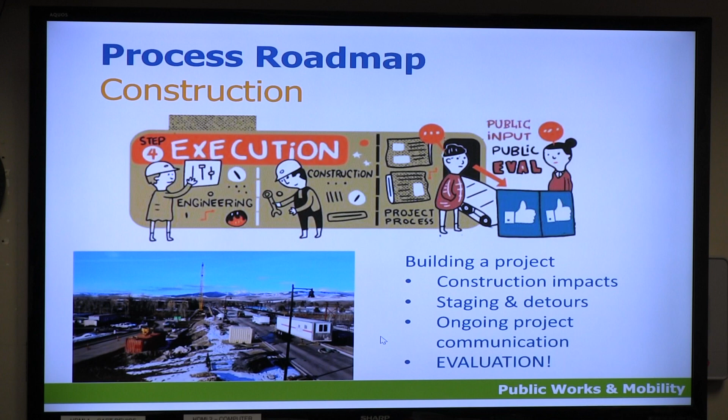I'm just going to go quickly through one of the other pieces we do. Missoula in Motion is our education and outreach program.

So we do all this infrastructure piece, but we also know we need to do the education and outreach for a whole variety of reasons, both from a multimodal transportation perspective, because a lot of research has shown that the idea that if you build it, they will come is sort of true, but not really in transportation, because it's just different decision making and different routes, and it's not always intuitive to switch modes. So what Missoula in Motion does is a lot of outreach and promotions, encouragement, trying to get people to try other modes, offer incentives to do that, education around safety and how to do other modes of transportation effectively and safely.

And then there have been a lot of changes like COVID and telecommuting, and we try to encourage places to offer telecommuting, because that is a sustainable mode of transportation. It takes a vehicle off the road every time you work from home, and that can be really efficient in the long run. So there's a couple of programs.

One is the Way to Go Club. This is our primary encouragement option. We have an online tool that helps people find routes, because again, the way you would bike is very different than the way you would drive often, and same with walking or transit. So it's just getting information out there, helping people understand how to make those trips if they're interested, offering rewards.

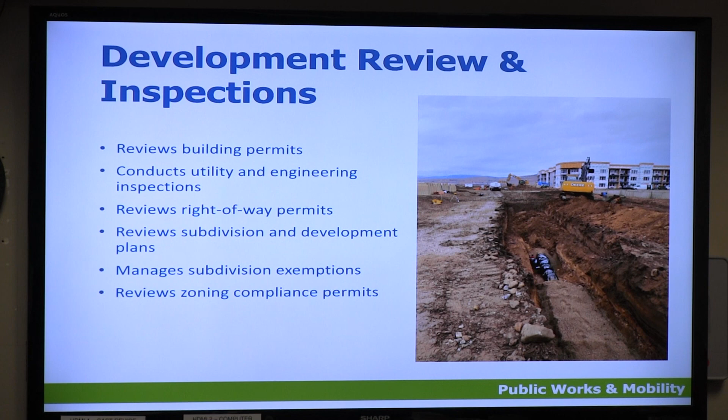In surface transportation engineering—basically in planning we get up through a project design, and then engineering takes over and goes through the more detailed engineering and construction. There's really good consistency in Public Works going from planning all the way through construction, and engineering comes in at that phase. Once we have a project funded, they work with consultants, coming up with designs, getting all those plans ready, and working with contractors to actually build the project.

They're also doing traffic studies and evaluating a lot of the projects we do, helping us collect speed studies, evaluate all that data, and make sure we're actually doing what we think we're going to do. So they take the idea and put the plans on paper and work through construction.

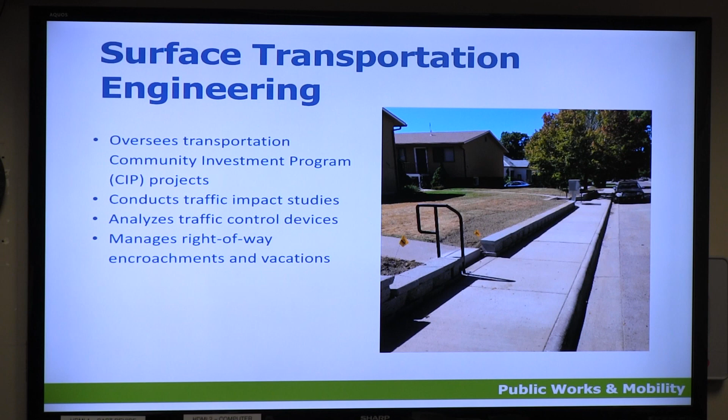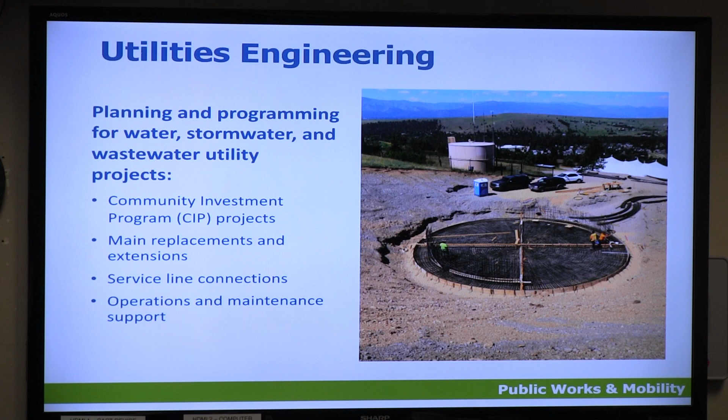And then finally, utilities engineering—you'll hear more about this from Logan and the work that water and sewer and others do—but they're working on CIP projects. These are all the utilities: sewer, water, and stormwater facilities. The engineers are helping detail those plans, create the projects, and help get them constructed so we have operating utilities.

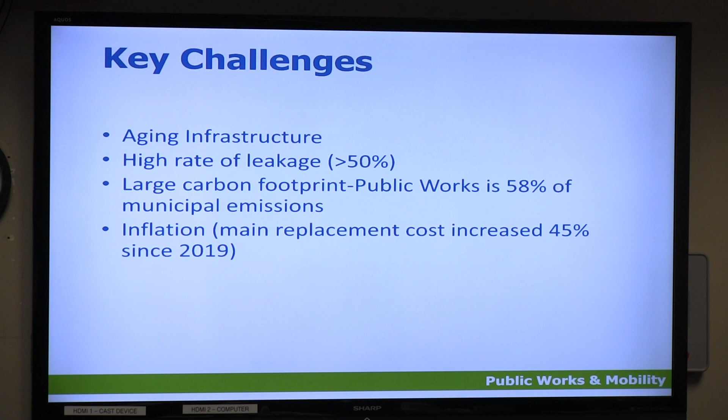Another challenge, inflation has just killed us the last few years. Just since 2019, the cost of replacing a water main has gone up about 45%. So that's been a real challenge for us.

Can you tell us where those are located? Right behind this building there's a patch in the street—there's what was called invasion pipe. The water company after World War II got a great deal on some surplus pipe, and the walls were about that thin 60 years ago, and now they're even thinner. They held up pretty well though. They're everywhere, mostly in the valley floor. The South Hills didn't develop until the 60s, so those pipes are 50 to 60 years old.

So you said the older pipes are metallic—what are newer pipes made out of? We still put in metallic pipe. About a quarter of the system is PVC pipe. For maybe 20 to 30 years we were putting in PVC pipe, but it's got issues. We had a guy almost die in a trench when a PVC pipe split while they were tapping it, so the water company moved away from PVC pipe. We wrap pipe in polyethylene now, which protects it from corrosion so it lasts a long time. But a lot of these older pipes weren't cathodically protected or didn't have any kind of barrier—they were just buried in the ground. So corrosion happens.

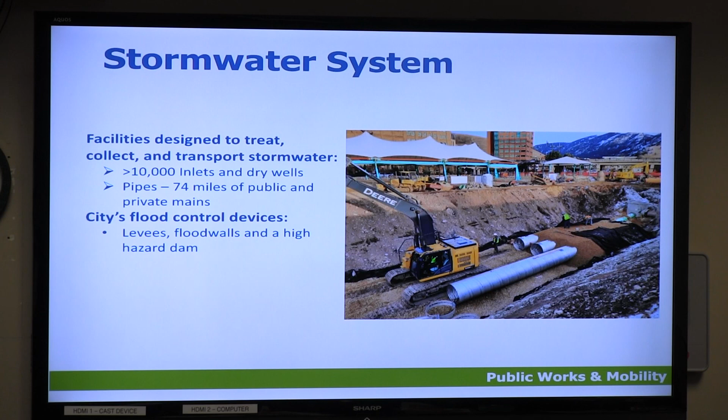The city also has flood control devices that the stormwater utility is responsible for — that's levees along the Clark Fork River, a flood wall just upstream from Caras Park, and we manage a high hazard dam in the Playfair Park area, which is designed to handle floodwaters from the Pattee Creek drainage.

We do lots of general maintenance. All these facilities must be routinely inspected and maintained to ensure they function as they were designed. Like I talked about the dry wells, we vac them out. A lot of times they just silt in — you can suck the leaves out, but a lot of silt gets down into the gravels too and eventually plugs them up. So that's Brian's crew, helping us replace hundreds of those every year.

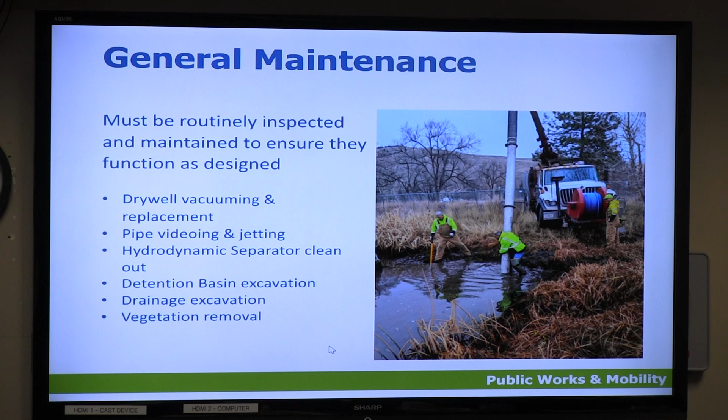We have a lot of detention basins in town. The picture here, I believe, is the sedimentation basin at Pattee Creek Drive. And we have lots of drainages that we occasionally have to excavate and remove vegetation and things from some of these detention ponds.

Some of the required sampling - there's 58 different outfalls to the various rivers and streams that flow through town. We're required to sample 6 locations twice a year, in the spring and fall, during rainfall events. The typical things we sample for are temperature, pH, metals, total suspended solids, chemical oxygen demand, nutrients, and bacteria. These are the things that have the potential to impact the water quality in our rivers and streams.

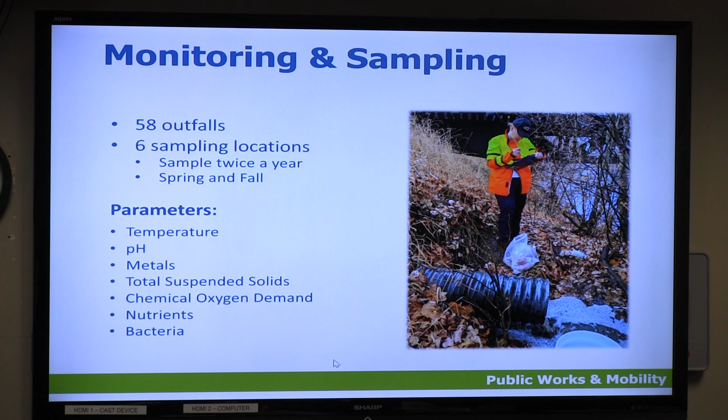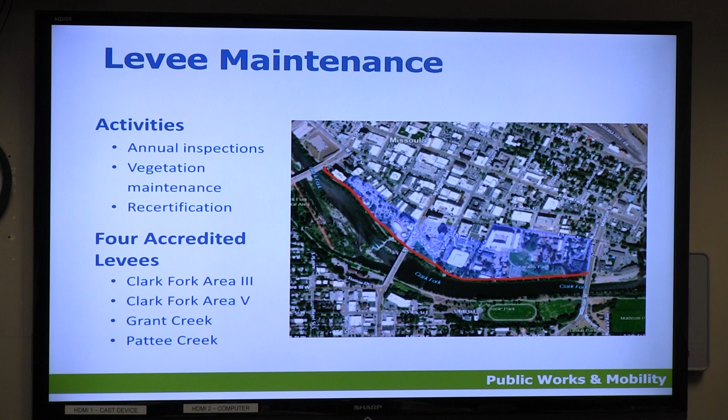On to the wastewater utility, unless there's other questions.

Wastewater has two main groups. We have the collections group on the right, which runs the pipes and lift stations that get the sewage from all the towns, homes, and businesses down to the resource recovery facility. We used to call it the wastewater treatment plant, but at some point it occurred to us that we're not just treating things, we're actually recycling materials and recovering a lot of resources. So we feel a lot better thinking of it that way, as a way to recover these resources.

That group includes a lab - we have several lab employees - and then facility operations and maintenance, and then the Garden City Compost, formerly EKO Compost, which the city acquired back in 2016, and I'll talk a little more about that. The wastewater division has 35 employees that keep all of these facilities running.

A little overview on the collection system: we have about 377 miles of sewer lines in town that collect the wastewater via gravity and take it to the treatment plant. But gravity doesn't always work, so we have 31 different locations where we have to lift it up so it can then flow by gravity to the treatment plant. Sometimes we have pressurized force mains, but for the most part the lift stations just bring it up to a higher elevation and then it flows by gravity. And on the south side of town, we have about 1,800 step systems, which are septic tank effluent pump systems, put in during the 90s.

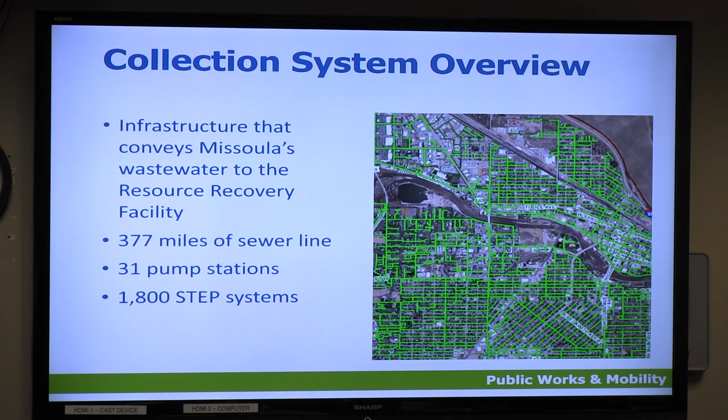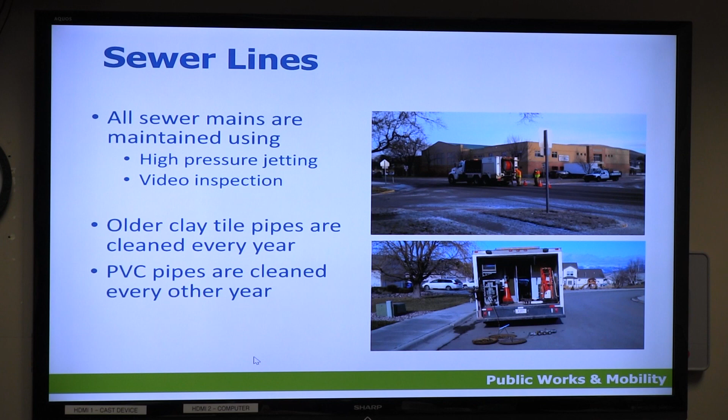Talking a bit about the maintenance that has to happen - all of our sewer mains are maintained using high pressure jetting and video inspection. We jet out everything on a 2-year cycle, and some of the older parts of town with a lot of root problems get jetted every year. The older clay tile pipes are jetted every year, and the PVC every other year.

Moving on to the resource recovery facility - this is a nice picture that shows it all. You've probably all heard of the poplar farm, which is the big trees out there off of Mullan Road that we use to spray wastewater onto.

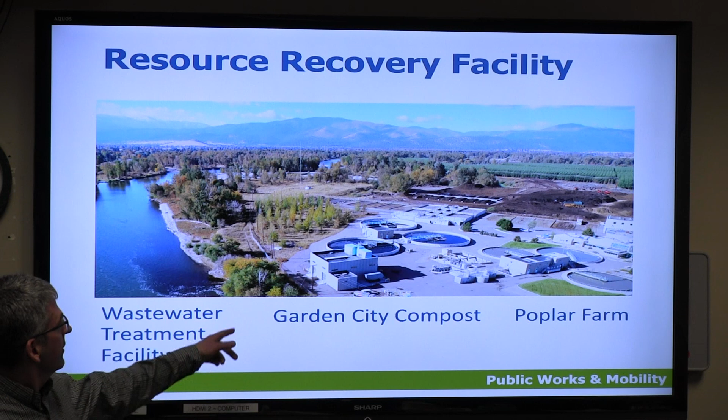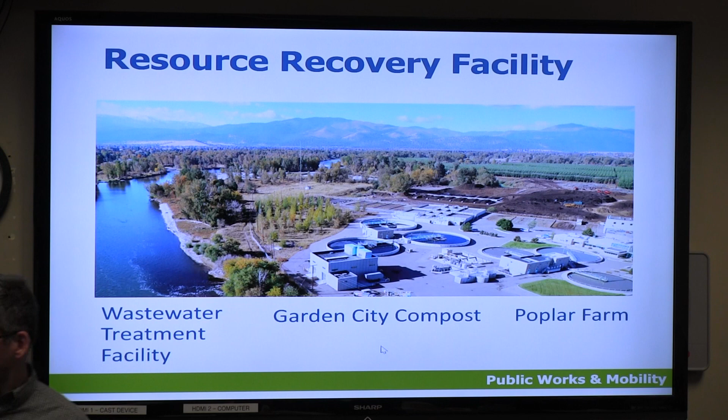The Garden City Compost, formerly EKO Compost, is in this area here, and it's there largely because they combine green waste from town - yard waste, clippings, and tree trimmings - with the biosolids we produce at the wastewater plant, and turn it into a high quality compost product. And then the wastewater treatment facility itself is these structures here, and I'll talk in more detail about all of that.

Without getting into too many details, I just want to give you an overview of how the wastewater treatment process works. Prior to the 60s, the sewer pipes in town literally ran into the river. There was zero treatment at all, it was just dilution is the solution. You put it in the river and it flows away. But starting in the 60s, people started realizing that wasn't so good.

So they put in primary treatment, which is a physical settling process. This has been improved, but this is still kind of how wastewater flows into the plant. It flows in, and we have big bar screens that take off the rags and large debris, which goes to the landfill.

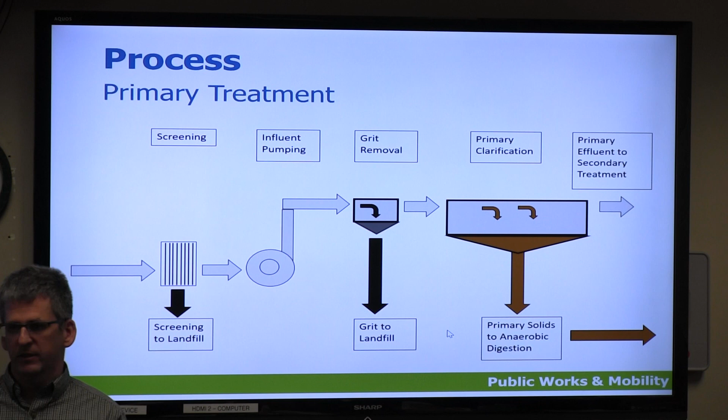We have to pump it up because it comes in very deep below the river. Then we remove grit from it, sand and other things, and that also goes to the landfill. The wastewater flows into large clarifiers for settling. The water flows off the top to go to secondary treatment, and the solids, about half of the organics, settle out in the primary clarifiers, which go to anaerobic digestion.

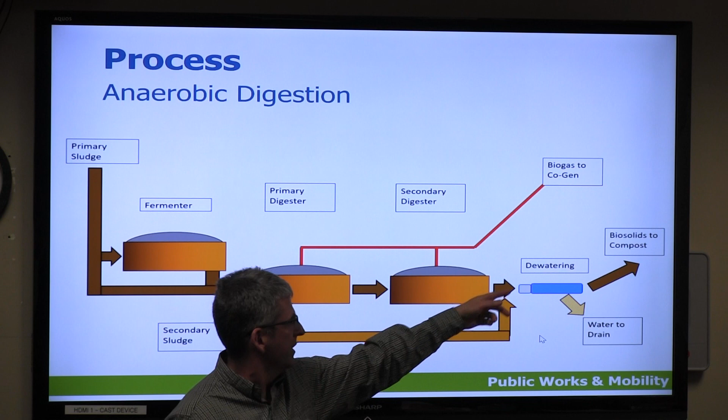The secondary sludge doesn't get digested. It comes down here, gets mixed, gets dewatered, and then the biosolids go over the fence on a conveyor belt over to Garden City Compost. Eventually to Garden City Harvest - Freudian slip, I apologize. Where does the secondary sludge come from?

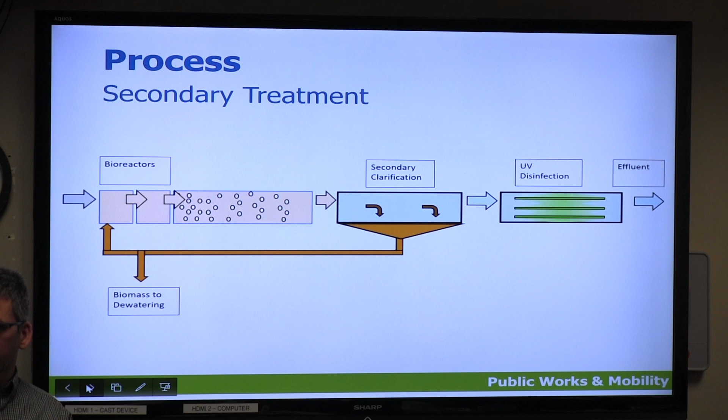It comes from those secondary clarifiers. So if we back up a slide - so these are the secondary clarifiers. Oh okay, so those don't require digestion. Like the primary stuff, it's got a lot of organics, it's kind of nasty stuff, so it needs to be treated through that digestion process. But at this point, it's just kind of bugs that are dead.

How do you deal with household chemicals, such as using Comet or bleach to clean your sink, that goes down the drain? They're just not harmful, honestly.

They're diluted to the point where they're pretty much harmless. There are things people could pump in that would kill all the bugs, but household cleaners aren't in that category. We have 8 million gallons a day flowing through, so it just gets diluted out. Good question.

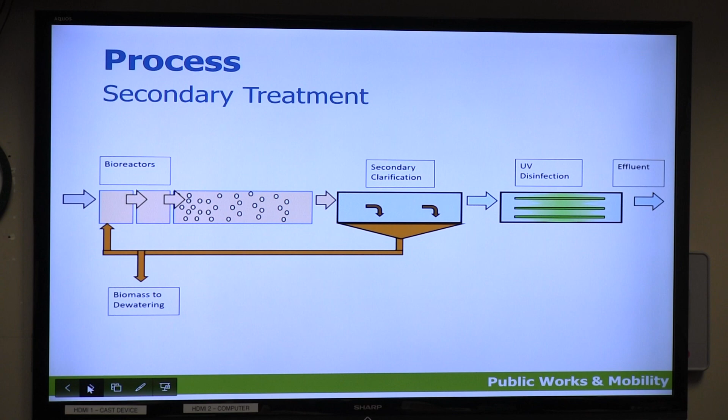Are there commercial or industrial contributors that make the system hard to manage? Yes, we have an industrial pre-treatment program and monitor what industrial dischargers are putting out. I don't know if any are required to treat separately, but they pay a higher rate. We have specific charges for organics and nutrients, since we're spending a lot to remove those, so dischargers putting more into the system pay more. We also monitor to make sure they're not sending anything nasty that would interrupt the biological process.

The primary clarifiers were built in 1962. The biological nutrient removal plant was built around 1999-2000. Then a new headworks was built, with those screens and facilities for odor control, built around 2010.

How close to capacity are we with the growth we're seeing? Our facilities plan shows we have plenty of capacity through the planning period, up to around 2037. But there's a big unknown: the state is really ratcheting down what we can discharge for nutrients. Our permit is expired and administratively extended because there's debate over what to do with these nutrient limits. Once the new permit comes out, it's hard to say. Hydraulically we have lots of capacity, but if nutrient limits get ratcheted way down, we'll have to deal with that.

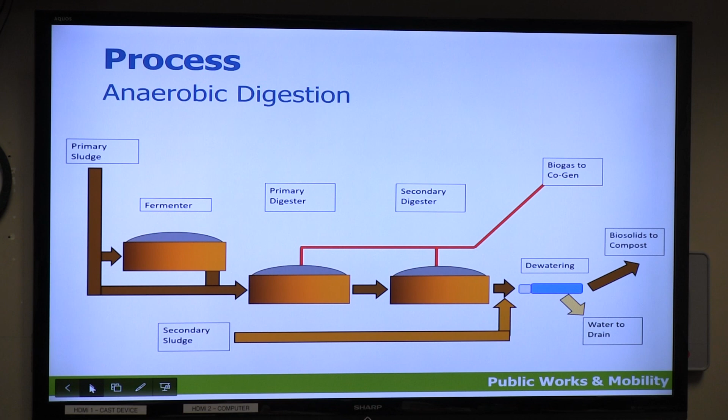Shipping it somewhere else? No, either providing a higher level of treatment, which means lots more power consumption. They could make us put in membranes. There are always ways to remove it, but it could cost hundreds of millions of dollars and consume a lot more power. We also have the poplar plant next door. About 10% of what we produce right now goes out to the poplars. Land application is always an option.

Is there another name we call the poplar farm? Some people lovingly refer to it as the poopler farm. So when do you harvest the poplars? That's a good question, we're evaluating that. When the facility was built, there was a mill in Oregon where the poplars were going to be shipped, but that mill closed down. There's not really a market for poplars now, so we're evaluating the future for them. Poplars aren't the only crop we can grow out there; there are lots of other options. If you want poplar trees, we can maybe even deliver them to you. That's something we're working on.

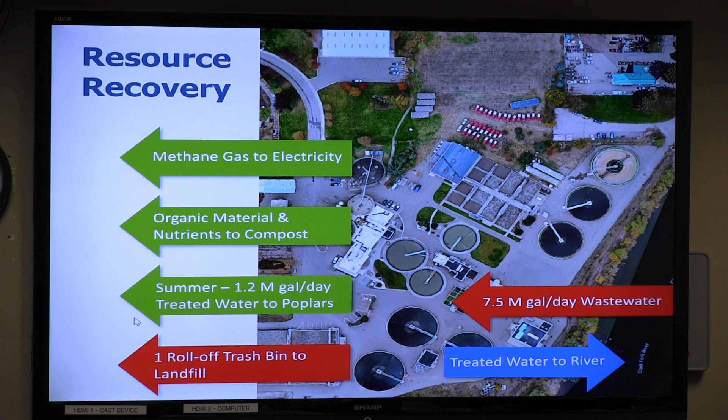I have a couple more slides, but I've covered most of this, so I don't think I need to go over it more. We're just talking about a lot of the recovery that we do out there.

Just real quick, this is the cogen facility. It generates about 200 kilowatts of electricity. We're recycling about a quarter of the plant's electric needs just from the methane gas that's produced.

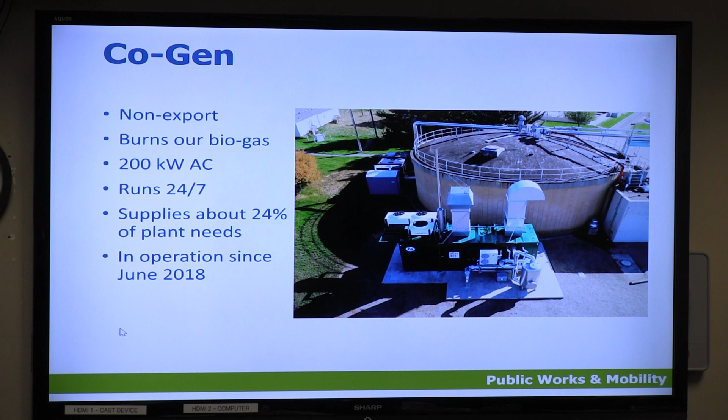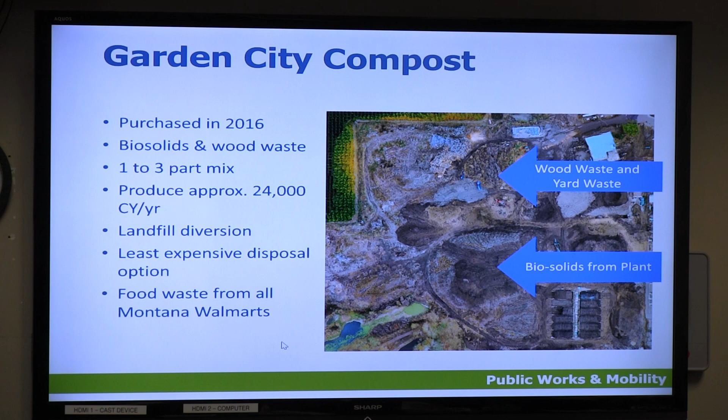Garden City Compost - I won't talk too much here. We produce about 24,000 cubic yards per year of compost using the biosolids and wood waste.

Just the last thing - Missoula's combined rates for water, wastewater, and stormwater are the lowest in the state. Your wastewater bill is like $17 a month or something. It's incredibly cheap for everything this group does, so we're pretty proud of that. We need to raise them, but we do a lot with minimal resources.

Who's in charge of the drainage and irrigation ditches? The Missoula Irrigation District is the main one in town - there are irrigation districts that handle that, not us, unfortunately.

If I heard you correctly, you said you can produce up to 74 million gallons of drinking water a day - have you ever come close to needing that much? No, back in 2007 we hit 52 million gallons a day when it got really hot, 107 degrees. That's the most we've ever produced. The last 5 or 10 years we haven't exceeded about 45 million gallons a day, and as we reduce leakage we hope to keep reducing that over time. So yeah, we have lots of capacity to produce water.

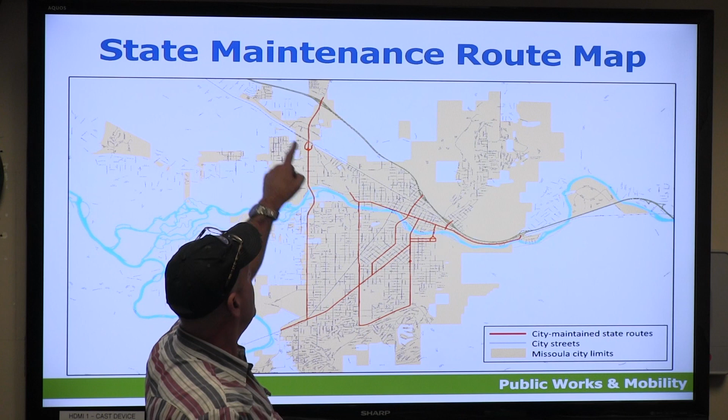Next one, Lauren. I apologize that this is kind of small, but you can see these are the maintenance agreement state routes. Now this isn't all of them, but these are the ones we've defined in the contract. Actually, Broadway here, it is within city limits, but it continues further on, even through the newly annexed area. The maintenance chief asked me if I wanted to continue Broadway. I said no, because I have enough to do for them, and they probably wouldn't want to pay me anymore to maintain it. So this is all on our website if you want to take a closer look.

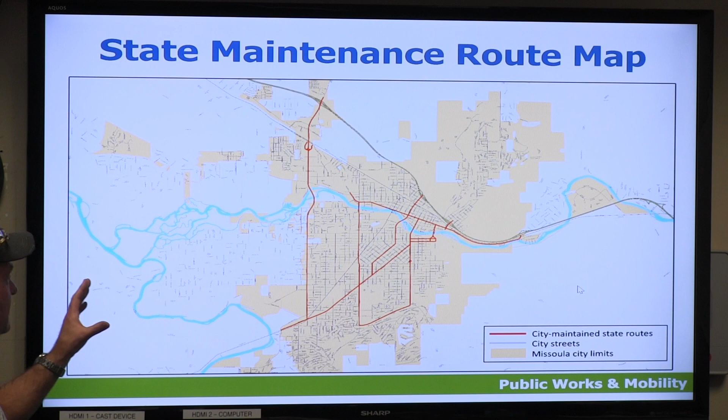Next one, Lori. All right, so our signals comm shop, we have 1 superintendent and 3 technicians. They maintain the city-owned traffic signals, which are only 11. When I first got this job as deputy director, I thought we had more than that. But most of them are MDT's, and they are covered under that maintenance agreement, so we get paid to maintain those.

Pardon me? Oh, was that a question? Talking out loud, that's fine. My left hearing is not great, so.

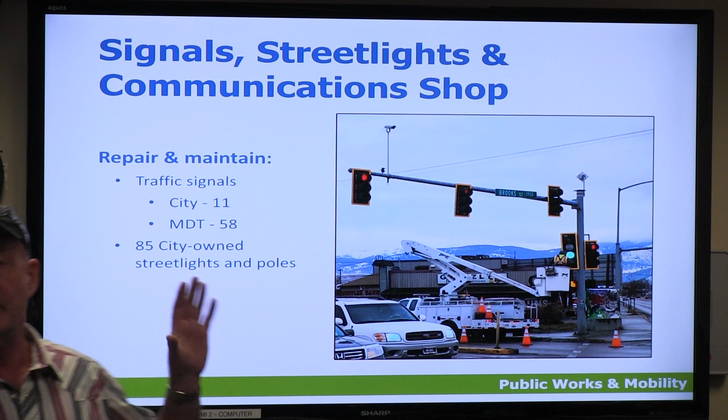And the city also maintains 85 streetlights and poles. Now, there's a lot more streetlights in this town than 85, but those may be owned by Northwestern Energy, who may lease them, or there may be lighting districts owned by adjacent property owners. So these are the ones that the city owns and maintains, and this is all by our comm shop signals.

They repair, maintain, and install these. This is called an RRFB, rectangular rapid flashing beacon. These are kind of cool, and they improve the safety at pedestrian crossings. We try to install some of these every year. They're somewhat expensive - we suffer with the inflation too that Logan mentioned - but these are an excellent tool for improving pedestrian crossings, and we're starting to get more and more. They are solar powered too, which is nice, although the one at Sentinel, someone stole the solar panel off.

Next one. Are there restrictions on types of roads that those can be on? So remember, I think it was Aaron mentioned the NTMP. Yep, so that's - did you give them the acronym, Neighborhood Traffic Management Program?

No, you just did. So Missoula, the city loves acronyms, and we have teams for a lot of things.

That's one of them. So not only just for RRFBs, but everyone says, why didn't you put a stop sign here, or why don't you change the speed limit? The NTMP focuses on local streets, the low volume streets where probably most of you live. We obviously can't afford the additional maintenance cost to just pound these in whenever somebody says someone's speeding on my street, or I want an RRFB, or I want a roundabout. Well, all that stuff costs money, and we have to maintain it. So Ben Weiss on Aaron's team, he's the head of the NTMP. He starts the process, and they do analysis - speed analysis, crash history. There's a whole bunch that goes into it before these can be put up. It's basically a way to manage limited resources and also look at all the factors that can necessitate increased safety. Okay, great question though.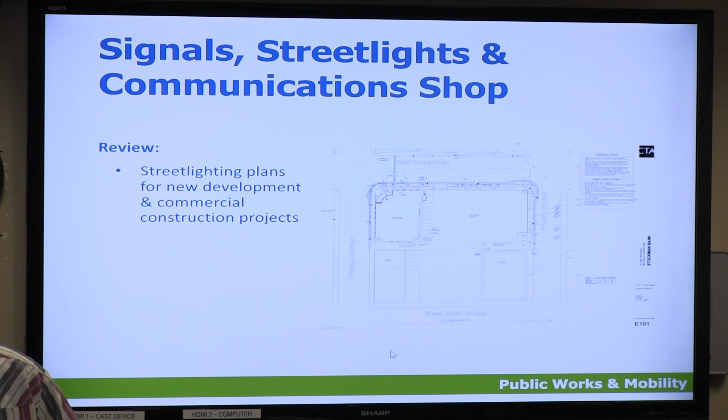So next one. Another aspect of that comm shop signals is they review development plans for street lighting, so that when developers want to put in street lighting, or have to because the city made them, they put in the kind that we want - that we know we can get parts for, and that we can repair down the road.

Next up, traffic services.

Signing and striping - you've probably seen them out there painting streets. Ever drive through it when it's fresh? Get a little free undercoating. I've done that on my city truck, had some yellow polka dots for a while. These guys really do a great job. They go out and do 93 miles of long line striping.

They also do pedestrian crossing refresh. We've done them for a couple years now, using some thermalay pre-mark to make our ped crossings last longer. We've changed our paint too - we used to only get about a year out of some long line striping, now we're maybe seeing 2 or 3 years, but it depends on traffic. I don't know how many crosswalks they do in a year, but it's a big job.

That's another thing - in the NTMP, everybody wants to stripe a crosswalk. But every one of these we have to maintain, so those also have to go through that process. A legal crosswalk doesn't necessarily have to be striped. Does it add a factor of safety? Potentially. But then we have to come back and paint them.

We already have more than we can keep up with. But we've also changed the type of product we're using - we're getting longer life out of these piano keys, for example.

I noticed some crosswalks have just the two lines going across, and then there are ones that are fully striped - how do you decide which one to put down? It goes through the NTMP. These are more expensive, and then you throw in the green ones for the bikes.

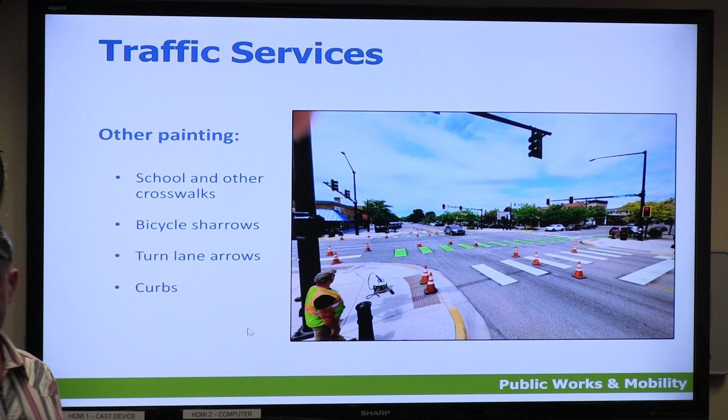Another big part of what they do is replace signs. Signs actually have a life on them - did you know if their retro reflectivity wears out, they should be replaced? There's what, maybe 100,000 signs out there.

Signs also get stolen. There are some particular favorite ones, like Mary Jane - we can't keep that one up, let's call it MJ. I think they changed it. Or if some signs match a person's name, like up in Linda Vista - you'd be amazed how many signs get stolen around here. I bet if we could raid a dormitory at U of M, I could probably get the inventory back.

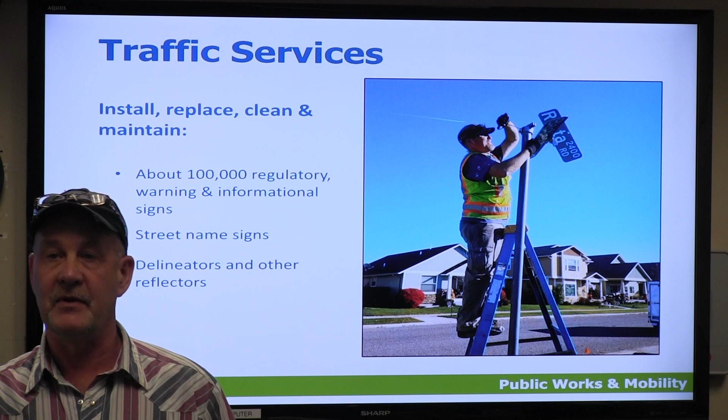Besides that, they even have to clean signs and delineators - the median on the Reserve Street Bridge, you've seen those little median reflectors? Those things get dirty within minutes. So these guys go out there with a pull-behind trailer or power washer and clean those off. These guys always have stuff to do.

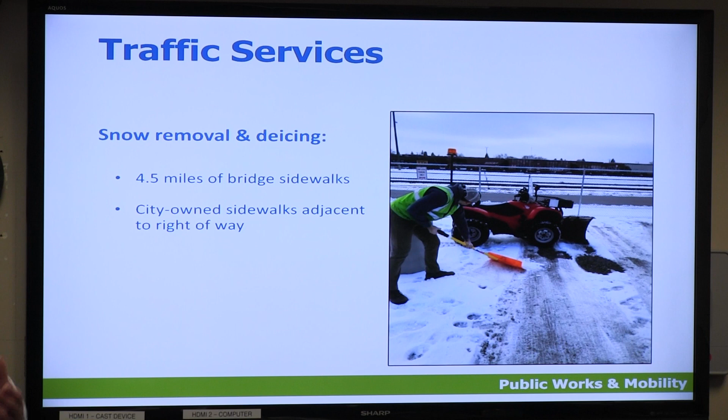Also under that MDT contract, these guys go out and shovel sidewalks on MDT routes because MDT is the adjacent property owner. You all know about the city's sidewalk shoveling deal - we all love that, big support. Sometimes the adjacent property owner isn't obvious, like when there's no one living there, or it's an MDT on-ramp. So these guys will go out and shovel those sidewalks where it's not always clear who the adjacent owner is. They do a great job on it too.

They also install some of our traffic management quick build products that we've talked about. This is the one at 3rd and Myrtle, and this was kind of cool - you'd think this was paint, but it's actually that pre-marked thermal lay where they lay it down and use a big hair dryer to heat it. Those should last maybe 10 to 15 years since they're not getting driven over.

Is that similar to the bulb outs by some of the schools? Yes, yeah - not a big fan of those. Well, this is a lot cheaper for your taxes than a full-blown bulb out with curb all the way around it, upgraded ADA ramps, and stormwater considerations. Those bulb outs - where are all your storm drains at? Right in the corner. Well, what if you bulb it out and the water can't get there anymore?

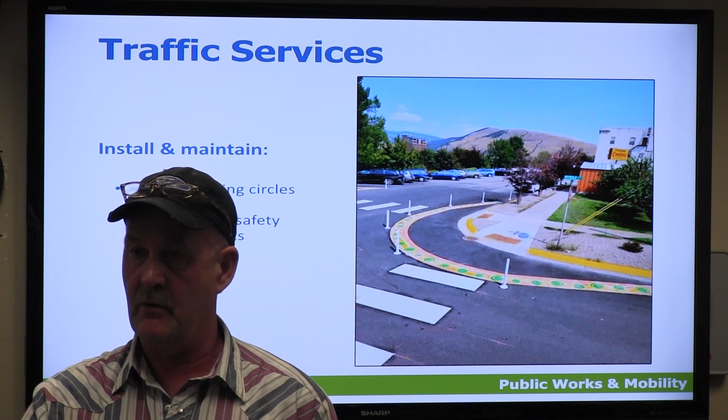Well, these don't affect that. The big deal on this is it improves traffic safety. They slow people down. They can be a little bit of a pain for me to maintain sometimes with snow plowing, but the trade-off is improved public safety.

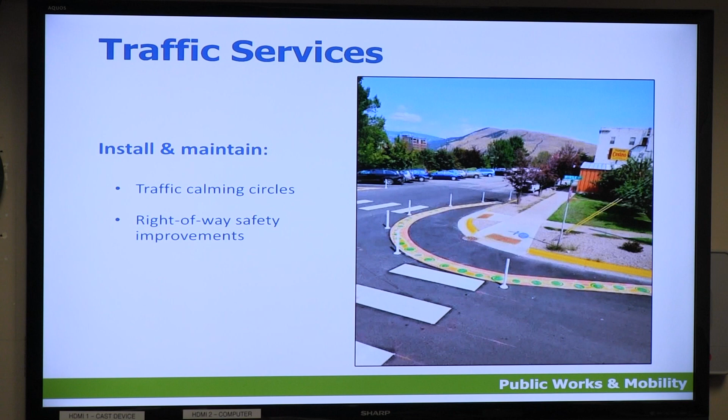Did you eliminate the bulb outs in the future then, because of these? Probably not. These are more temporary, until the city can acquire funding to put them in permanently. I think the bulb outs would be hard for the snow plowers. Occasionally, they get a few gouges in them once in a while.

Another part of it too, Aaron talked about the NTMP and all the studies that go into assessing local street speeding issues. We have our speed trailers and traffic services, they're the ones that go out and do those counts. Chad Pancake is the superintendent. He also reviews quite a bit of the private development street plans. Same deal, we want these guys to put in the type of signs that we can use and maintain, so he spends a fair amount of time reviewing plans.

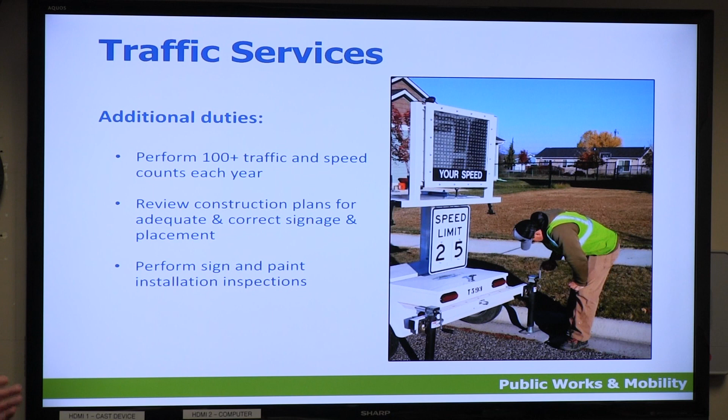Grinding sidewalks - this is a concrete grinder. They work in the downtown area because that's where our major pedestrian traffic is. You guys have all seen sidewalks that get heaved up. These go out and grind those down to make them safe. For a while, the city was really struggling with trips and falls on those heaved sidewalks. This program knocked our mod factor down by about 40% when it was implemented several years ago.

And they do some miscellaneous stuff. They help the police department with things.

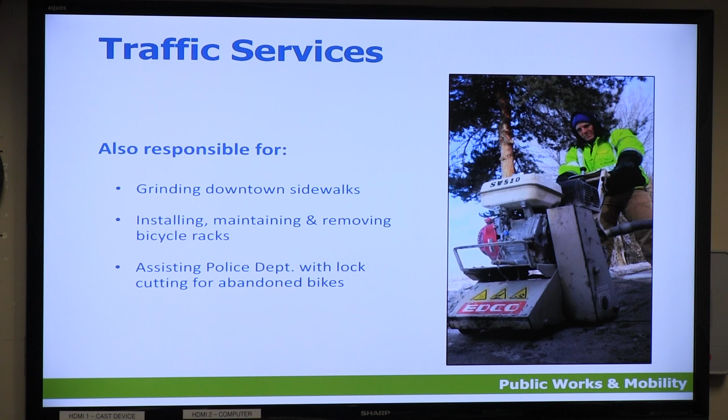Keep going. All right, street maintenance. So I was the street superintendent for 18 years before they promoted me to deputy director, because no one else would take this job. I'm kidding. I enjoy my job most of the time.

All right, you guys have all seen street sweeping. This is one of our bigger efforts. We have about 7 or 8 vacuum sweepers and 3 mechanicals, and we try to sweep the city 4 times a year. One time is usually in conjunction with leaf collection - last year we were a little behind on that, but it will happen. The sweeping program is really important for air quality and also for maintaining water quality.

Streets and stormwater have to work together. If their stormwater infrastructure doesn't work, then my asphalt falls apart. A lot of times, if there's no streets to drain into, why would the stormwater infrastructure even be there? So we work together. Prior to the creation of the stormwater district, streets took care of all the stormwater, but we didn't have as many regulations to follow in those days. So I was very thankful when that stormwater district was created.

How does street sweeping improve air quality? Because of dust? I was born in this town in 1969 - remember they used to sand everything? In 1995, Missoula's air quality was atrocious. They would no longer let us use sand. We had to switch to mag chloride, all because of the fugitive particulate. That's how - it's a big deal.

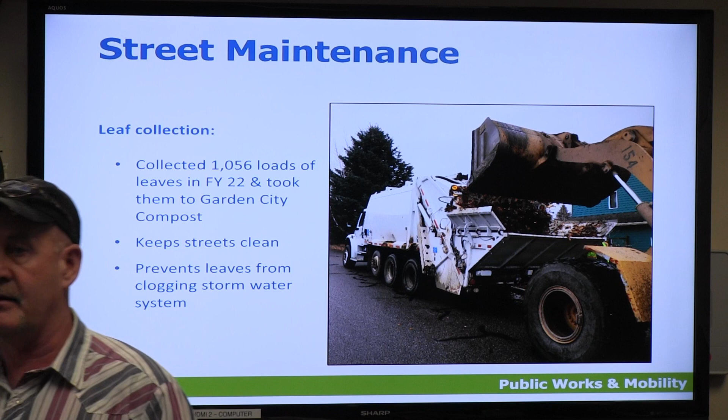I need new sweepers bad. The life of a sweeper is about 5 years. My newest ones are 7 years old. I think this year I'm hearing information that the vendors can comply with the Build America, Buy America requirements, so I'm very optimistic that hopefully by next year I'll have at least 4 new vacuum sweepers. But yeah, I would like to sweep more often.

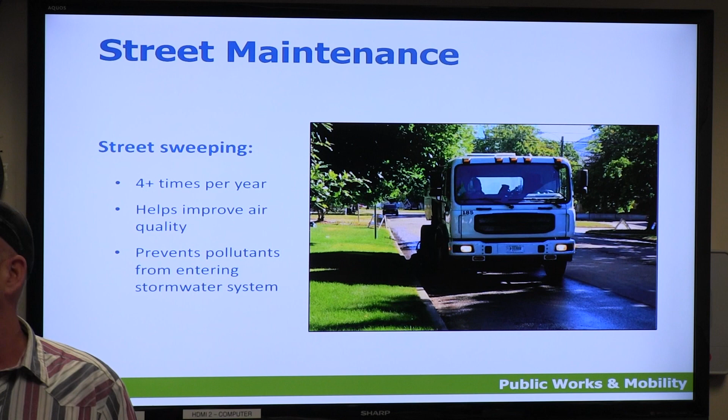All right, next one. All right, scratch this one off. No, obviously leaf collection's one of the much appreciated services we do. I've often thought that if I gave the citizens 2 choices, you can keep snow ops or leaf collection, I'm not sure which one they would pick.

I do too. Do you? Well, I would prefer to pick up my own leaves than to put them in the street and have what happened this year, and there's both sides.

During leaf season, we just get swamped with phone calls. People really appreciate it. They want to know where we're going to be, why we didn't get their leaves, how come we're behind schedule. It's a nightmare for us. Normally, when we should have been doing it in the fall, we're always going up against, okay, when's the first snowfall going to hit? Because the same people that do leaf collection are the same ones that plow.

So when it snows, I gotta pull everyone off leaf collection, then our schedule's blown up. So it's always, we never get it done on schedule. We oftentimes will get shut down part way through. We rarely get the sweeping done.

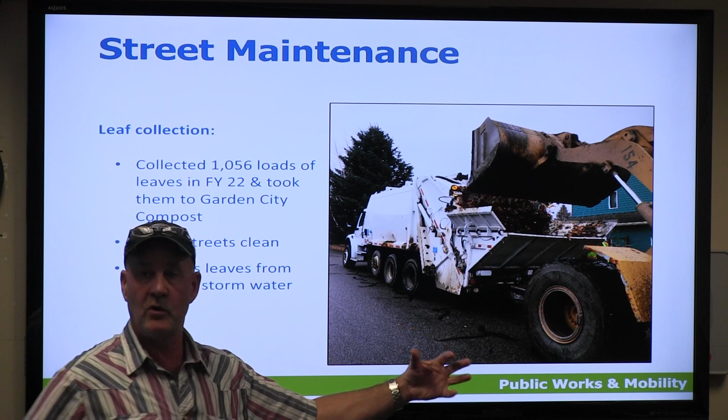We have pretty good luck at doing the bulk collection, this is a good picture. This is where you've seen the loaders working in tandems. This is dumping it into our garbage truck. I bought that garbage truck from Deer Lodge Surplus for $30,000. That one garbage truck can haul as many leaves as 4 tandems because it can compact them. I'd like to get another one.

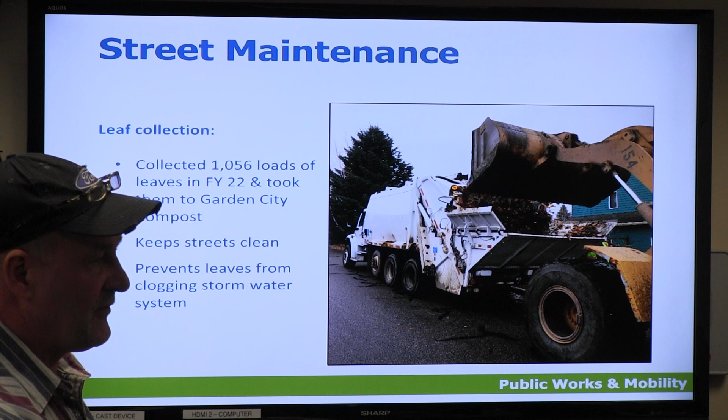Part of the reason we do leaf collection, I always get the question, well why do you do leaf collection? You're spending taxpayer dollars, you could be doing other things. We have to pick the leaves up that would naturally fall into the street anyway. Now, do we have to take the leaves that people rake into the street? That's up to you guys and council to decide. But we still have to sweep them, we still have to pick them up.

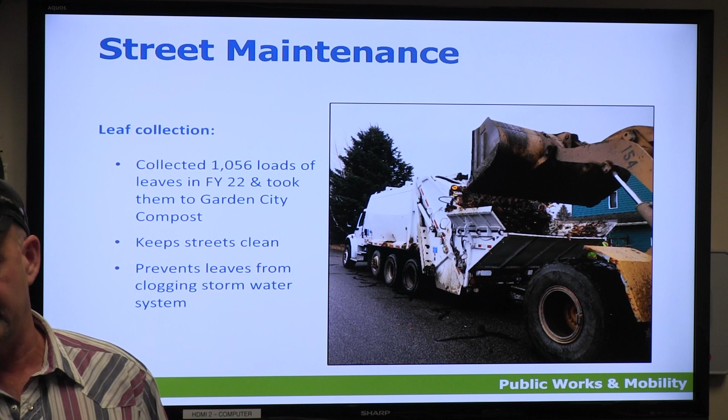Otherwise, they plug the stormwater inlets, they make pools on the water, and there's even talk about some of the nutrients as the leaves degrade, nitrogen and phosphorus getting into the stormwater infrastructure. So we definitely need to get them picked up. All right, next one. I could go on and on about leaf collection.

One thing, milling and paving. The city of Missoula is fortunate, we pretty much have a full-service paving crew, and we do a great job. It's probably my favorite time of year because I really enjoy working for the citizens of this town, and when I can go fix the street and they call me and tell me thank you, it's a great feeling. I just wish I could do more.

It's expensive. The weather's always fighting me. There were issues last year with asphalt availability. Our equipment would break down. We couldn't get parts, or if we could, they'd be 6 months out. I lose my big roller on my paving crew, I'm done. We had that all the time last year. I hope this summer's better.

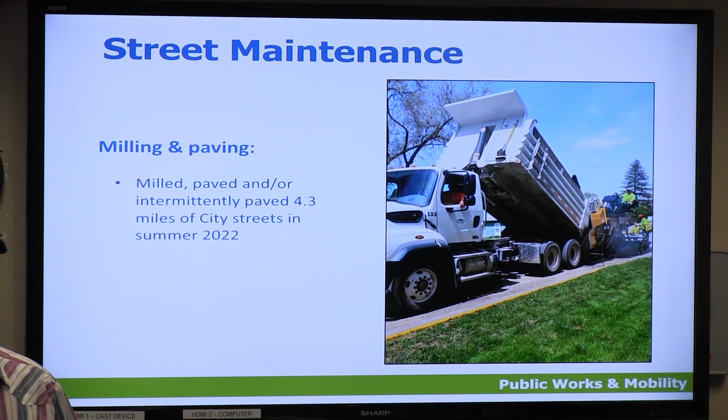Last year we did 4.3 miles, which is a little bit lower than usual because of some of those issues I mentioned. I'd like to see that closer to 6 to 8. Actually, I'd like to see it 40 or 50, but I need a whole other paving crew. All right, next one, Lori.

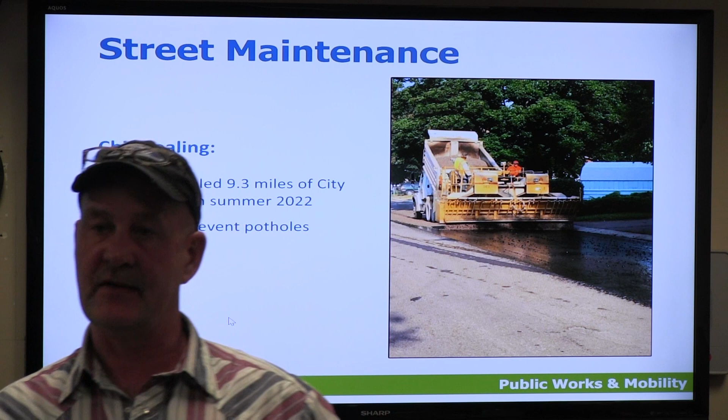Chip sealing. So another thing we're fortunate is we have a full chip seal crew and all the equipment we need. And chip sealing, bar none, is the best way to maintain asphalt. I don't care what anybody else tells you. It seals the street, it's like painting, and then you put a friction course that protects the asphalt from UV deterioration, and then you don't slide as much in the winter. Last summer we only did 9.3 miles.

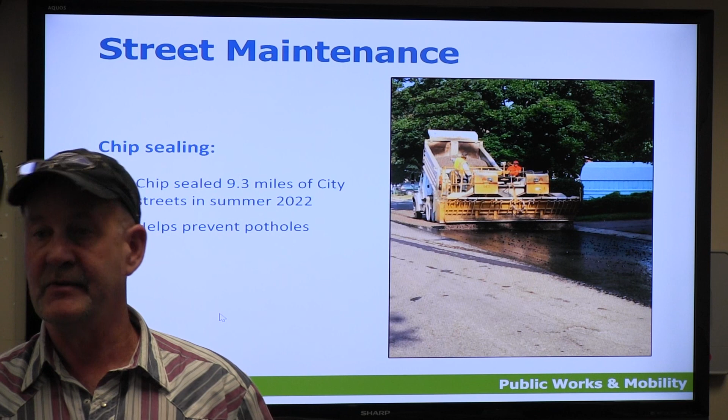The reason for that was I couldn't prep the streets before we chip seal because I couldn't get the asphalt when I needed it. So if I can't prep them, it's a waste of your money for me to chip seal. So I had to cut the program pretty much in half last year. But it's a great program to do, and we're lucky we can do it.

As a matter of fact, Missoula County, I understand, is going to get into buying all their own chip seal equipment too. So I'm happy, as a Missoula County resident, I don't live in the city. They've been calling me and we've been working together to get them going on it. Otherwise you'd have to outsource that if you didn't have your own equipment.

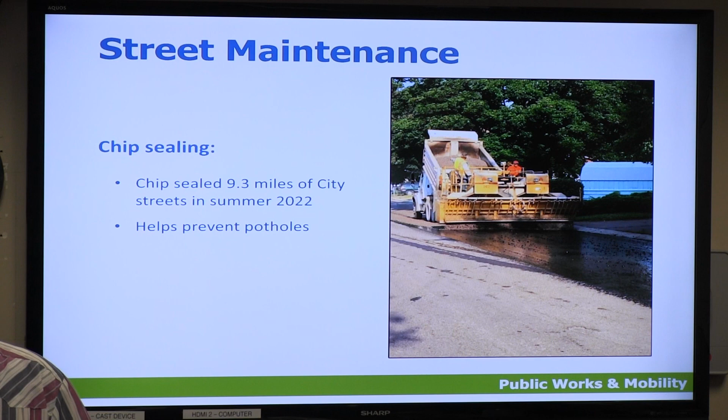Oh, it's expensive. All right, next one, Lori please. Oh, so leaf collection and potholes, my other favorite one. I often joke that when I retire, my goal is to have that number be zero one year.

Right, yeah I know, that's not going to happen. It's winter in Montana, 9,000, over 8,000 potholes so far. We track every one of them.

Wintertime can be challenging because the hot plants aren't open. When I say hot plants, that's hot mix asphalt. You know, you can go to Knife River Western and buy the mix. In the wintertime you have to use what's called a cold patch, which is a high performance asphalt product that has some secret special ingredients in it, but it actually works really well.

The only problem is it's about $400 a ton. I can buy hot mix this year for 65 a ton. So it's expensive, but it does work better than hot mix, plus it's really our only option in the wintertime.

Now the only issue is, say like this street right here, they're patching this pothole. See all this asphalt around it? It's shot, it's done. We're going to patch this one and then another one will be here and over here. This street has served its useful life. It needs to be milled up and redone.

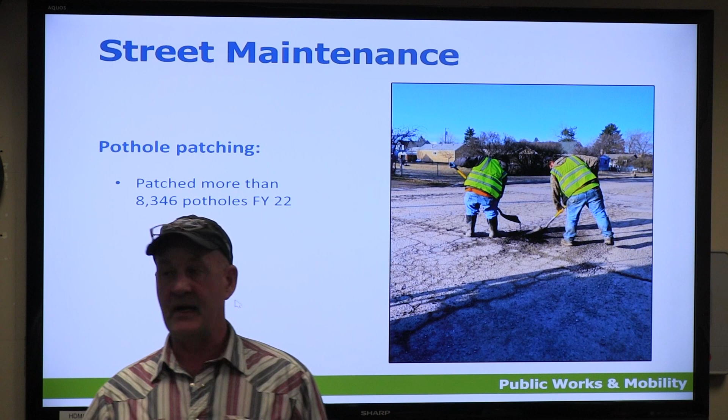But in the wintertime, what choice do we have? I can't go pave that in January. Hopefully in the summer I can come back and fix areas like this, but there's a lot more of those than I can do.

Next one. Snow plowing, this winter has been challenging for sure. I don't know if you are familiar with the priority system that we have. Over 60% of city streets are priority 1s, 2s, or 3s. We do that as a way to balance limited resources.

At the onset of a snowstorm, our crews mobilize, they go work on priority 1s: Russell, Reserve, Higgins, Mount, Garrett. They work on those pretty much until it quits snowing. You get a long-term event, we can go plow, sand, de-ice, and 20 minutes later it looks like we weren't even there. Imagine if I plowed and de-iced Reserve once and then took off. Doesn't work, does it?

So oftentimes, that priority crew, they don't even move on to their number 2s until it quits snowing. So often I get, why haven't you plowed my street? It's been snowing for 2 days. That's why. Now, fortunately, and I think Mirtha was here, maybe Gwen too, about 4 or 5 years ago, I requested and was given 4 more FTEs.

Full-time employees, with the sole intent to improve our snow ops. What I did was I traded in 2.5 seasonals, and I think it only cost like a half an additional FTE, so that I could put those 4 FTEs in, and then I pulled 1 person off the priority plows. They don't have to deal with priorities. All they do is go into your local neighborhoods from 8 to 5. So that's 5 pickup plows.

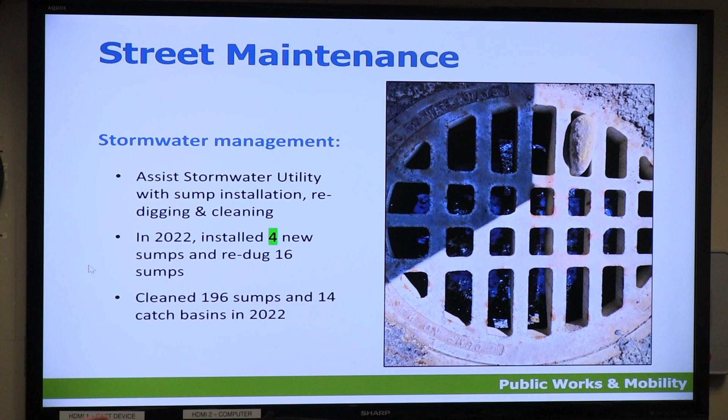Logan mentioned we work with streets, so stormwater used to be under streets. We clean sumps, we redig sumps that aren't working, and we install new sumps. A sump is simply a hole in the ground with drain rock around it, and that's where the water goes and drains. We're looking at some secondary treatment options and modifying how we do this. We also clean some of the catch basins on the pipe storm inlets.

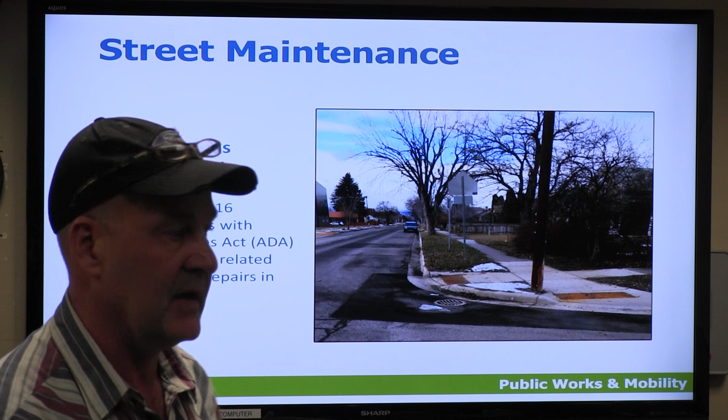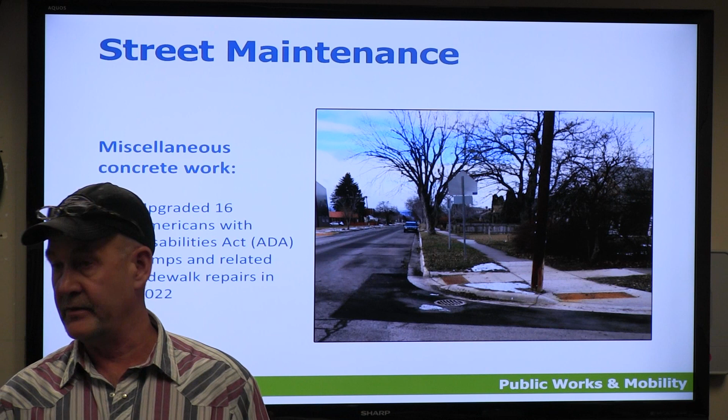Anytime we dig a new sump, or if we're paving across a pedestrian crossing or a head crossing and the ramps are out of spec, we're supposed to redo the ramps. So this one you can see we either redug or put a new sump in. It had ramps that were old, not in spec, so we had to do all that new concrete and install those truncated domes. That's a whole process, and you have to do the concrete first before you pave. So when I look at some of these bigger overlay projects, I have to look at how many ADA ramps I've got to do and whether I'll be able to get them all done. Sometimes it's tough to do.

So are you installing those as you go? When you're maintaining a street, at the same time you're doing the maintenance, you're trying to install those. I have a 2 to 3 person concrete crew.

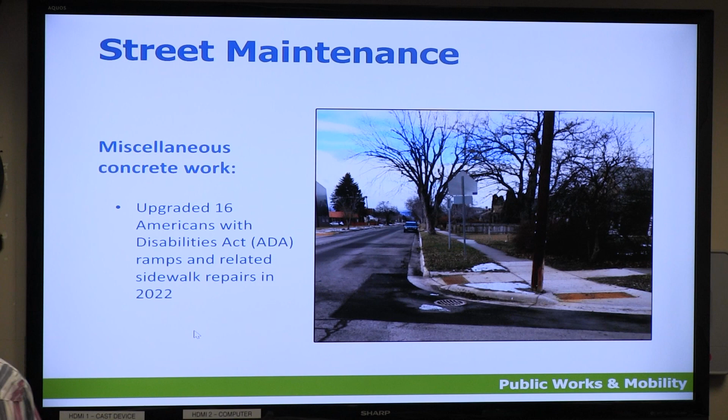We only did 16 last year. Next, crack sealing mastic — we put a big effort on Brooks last summer. You guys have seen those black ribbons on Brooks? That was our crew with the mastic. MDT reimbursed us for all the materials because that's a state route, under that maintenance agreement.

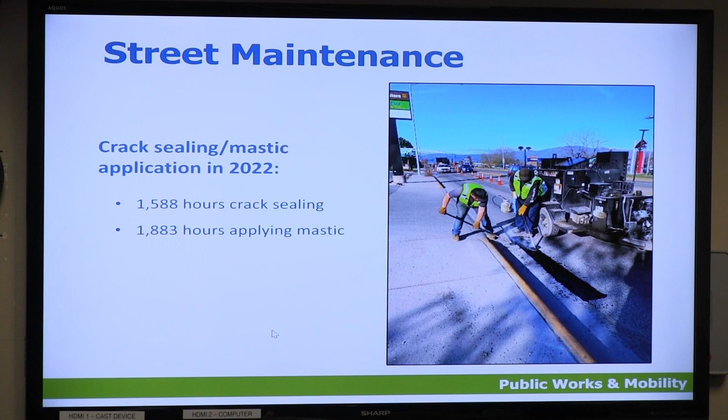We also blade all your alleys. We will not pave your alleys, but if they've been paved, we will patch potholes. If you've got a dirt alley and you want it paved, you need to get together with your neighbors and then get it paved.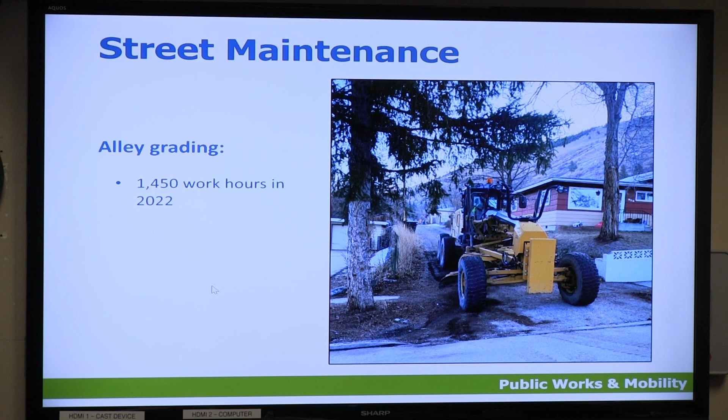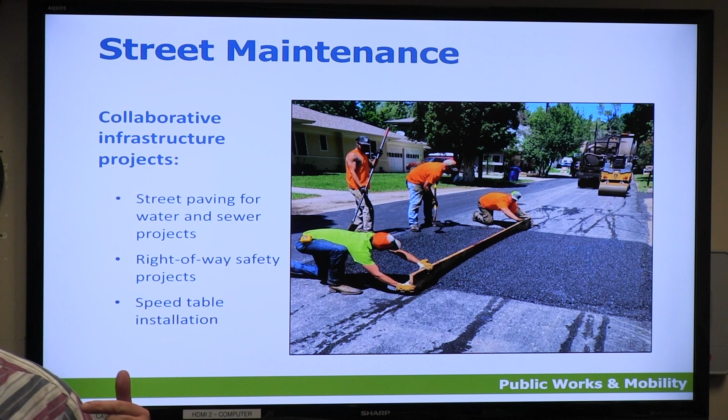This is a speed table, this one was on Missoula Ave, we did it two years ago. This is also part of the NTMP, where we address local streets with speeding problems. These are, in my opinion, extremely effective — kind of a glorified speed bump. They don't take a terrible amount of time and they're not terribly expensive. We did 4 on Missoula, and I did 2 or 3 on Simons and Normans. More to come.

Our funding source is Road District 1. We also get a little over 1.2 million from the gas tax — not the local option, that one was taken away. And then there's also bridge and road safety funding. That BaRSAA fund typically goes to bigger projects, and it's shared between Aaron's team and streets.

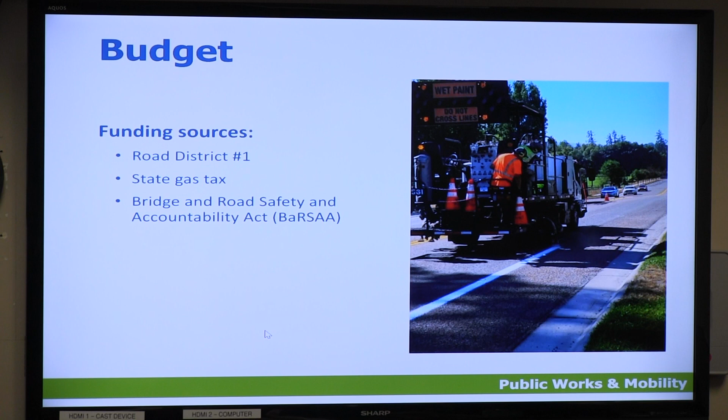All right, questions. I apologize, I could have spent a lot more time, but I always get pounded with questions, so I thought I'd leave some time for that.

I noticed all the bicycle paths are plowed — does Parks do that, or do you do that? If you're talking about the ones that are not adjacent to a street, yeah, those are Parks. Okay, thank you.

I'm curious about lighting. I live up in South Hills, and those lights going up Hillview are amazing. But then you get into my neighborhood right above Chief Charlo, and it's just so dark — there's a park there, but it's dark. Those lighting districts are complicated, and I'm probably not the one to talk about establishing them. I could maybe tell you a little about what you do when the bulb goes out. I wish Jeremy was here — it's a tough deal, complicated dealing with Northwestern Energy or setting up a lighting district. There's a lot to it. I could probably refer you to somebody if that's something you wanted to pursue.

One of my friends this afternoon was saying the manhole covers are sinking in a few places. Yeah, that happens — this time of year, with the freeze-thaw cycle, especially around sumps, water gets in there, then it freezes, and that can happen. We just looked at one today over on England that I've got to fix. So, lovely Missoula winter.